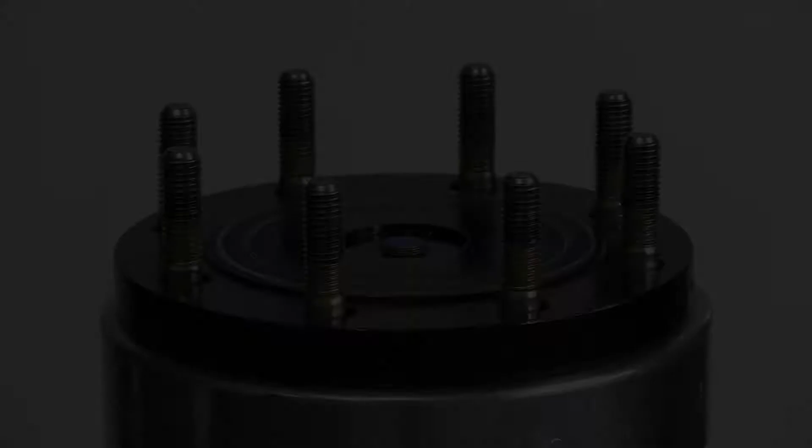What you see in front of you here is a FADU rig, Flange Assembly Demonstration Unit. It is a 4-inch 150 flange with 8 bolts that are individually strain gauged.

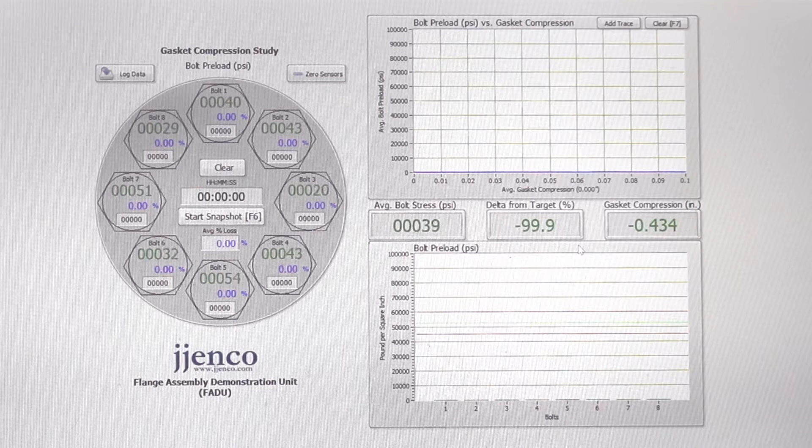So first, with any installation, we must always check to make sure that you are locked out, tagged out, the system is depressurized, and you are working safely.

From there, we will visually inspect the flange, make sure it's free of debris, that the bolts are not damaged, there's no dirt or grime in the flanges, and we're going to number the flanges. In this case, we're numbering 1 through 8 for the 8 bolts, and again we're numbering them in the star type pattern that we are trying to achieve our tightening sequence.

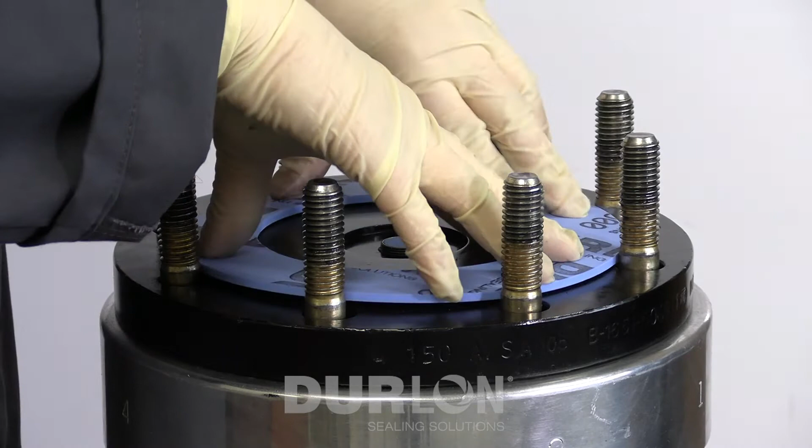Now, the first step is we're going to take the gasket and actually install it into the flange. In this case, it's a ring gasket, so it's going to sit within the bolt circle. Once we've installed the gasket, we're going to insert the top flange on.

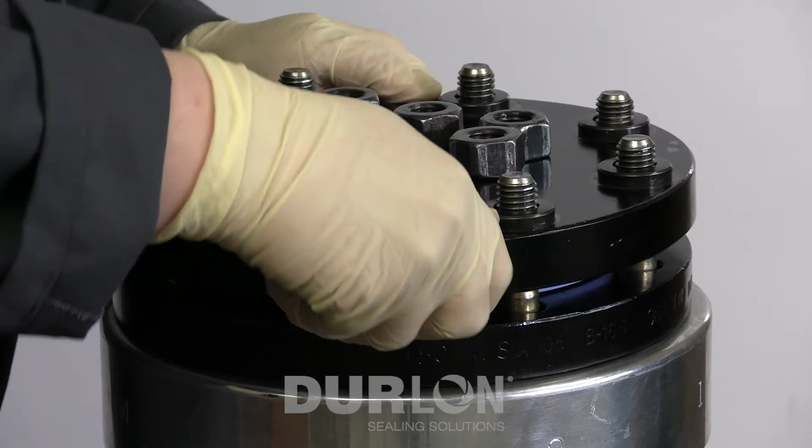Prior to doing that, we're going to lubricate all of the washer, nut threads, and bolts. In this case, we have a spray lubricant for ease of use. What we're trying to do is lubricate any wetted part where you're going to have physical contact. Any part that has any type of friction whatsoever, you want to make sure you have enough lubrication where you can literally see it from within 3 or 4 feet away. There's never too much lubrication when installing a bolted joint.

Okay, so now we've lubricated the flange, the bolts and washers. We're going to put all the nuts on here and hand tighten them, running them down until they snug up. We just want to give the flange a good starting point before we begin with the actual tightening of the installation. Now if you look at the screen, there still really isn't any stress on the bolts yet because we're just hand tightening.

Once these nuts are run down into snug, we will take a hand wrench and give it a 1/4 turn to snug up all the bolts. We're going to just give a 1/4 snug just to start a good reference point.

Now we can take our gap tool before we start and measure around the circumference in several spots to ensure that the gap is uniform. At any point, if you find that the overall flange spacing is more than a certain point, you can back off that applicable nut to ensure again that the spacing is uniform around the circumference.

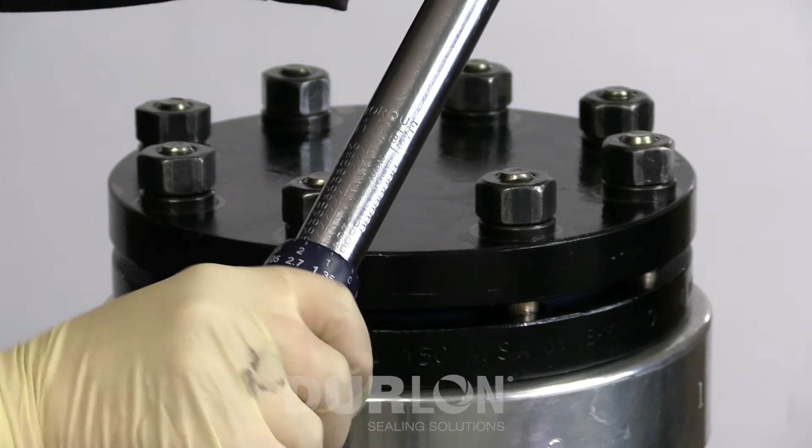So for our installation purposes, we're going to use 100 foot-pounds as our target torque. Now for the first round of our star pattern, we are going to use 30%, which is 30 foot-pounds. So initially, we're going to apply the 30 foot-pounds to our star tightening round.

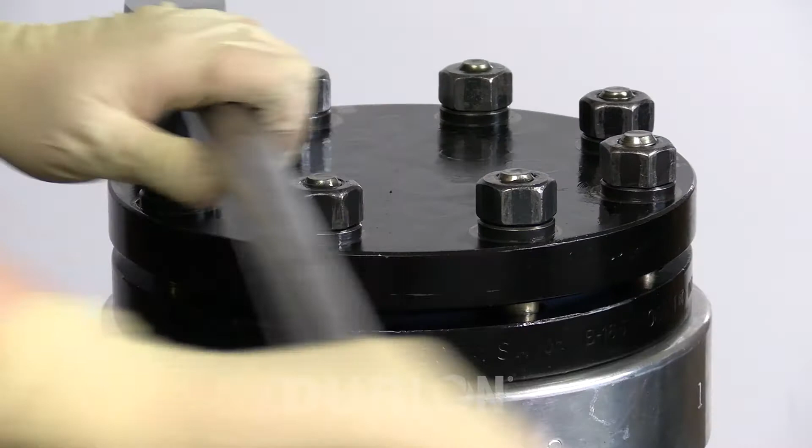As you can see, the first round is generally a little bit more difficult because the bolts haven't been physically tightened yet. But as we go, you'll hear the clicker wrench break. We're just applying the 30% or 30 foot-pounds in this case, and we're going to go in a nice controlled motion until the clicker wrench breaks.

As you're watching the screen here, you can see that as we start to do the star pattern and alternating, the actual bolt stresses look like it's skipping every other bolt. As one bolt starts to increase in stress, another one will start to decrease slightly. This is what is happening in the flange as we start to tighten. Hence why it's very important to use these multiple levels of tightening at different torques and using that star pattern.

And again, as you can see, we're starting to get a nice uniform torque. All the stresses are starting to increase. We're at a target average bolt stress of 14,000 psi, and we're still about 70% from our target.

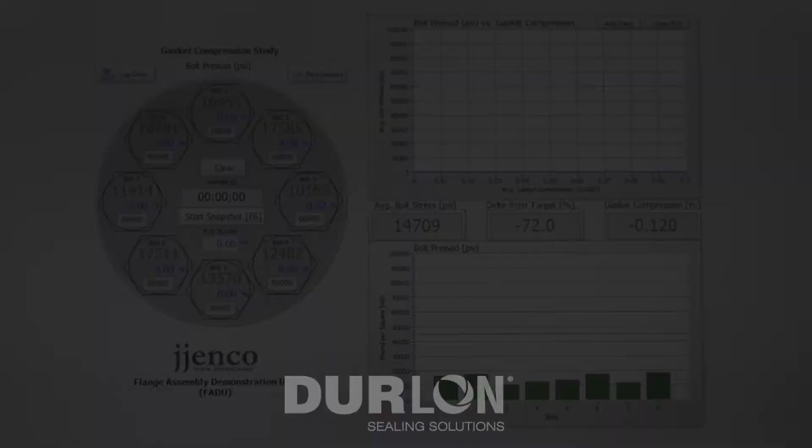So before we do our second round at 60% or 60 foot-pounds, we will actually check the circumference in several more spots using the Durlon gap tool. If you do not have a gap tool, you can always use a vernier caliper or a feeler gauge to check the gap and make sure it's uniform.

Again, we've succeeded, everything looks good. We're going to continue with the target torque of 60%, or 60 foot-pounds in this case.

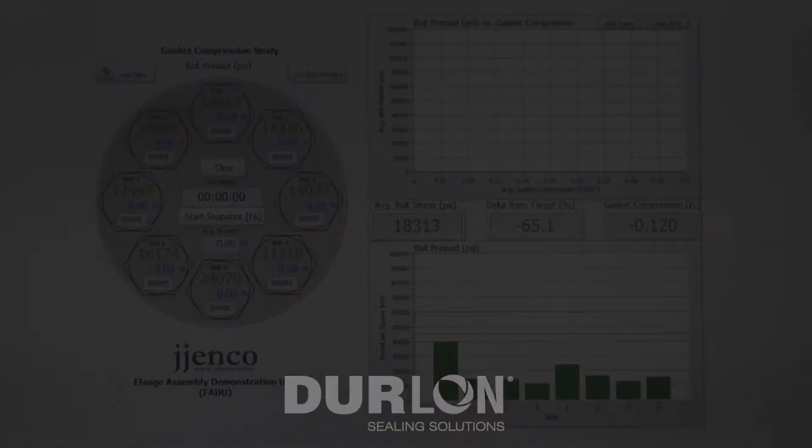When you look at the screen here, you can see bolt 1 starting to increase, bolts 2 and 4 are starting to come down. Again, it's this phenomena where as one side of the flange is tightening, the other side is reacting in the opposite direction.

One thing to point out, in a perfect world, as you're tightening a flange, ideally you would like to do all 8 bolts in one shot. However, that's not really possible. So by mimicking the rounds at 30, 60, and 100% of the target torque, in theory that's what you're starting to do.

So again, we'll do one final check to ensure that the gap is uniform. Once we've checked the gap with the gap tool around the circumference and ensured everything is fine, we will continue with 100%, or 100 foot-pounds in this case, of our final torque in the star pattern.

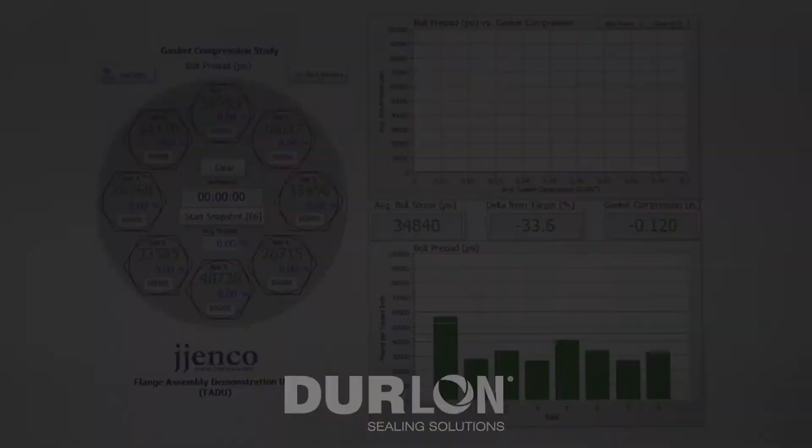Now the star pattern can also be known as the modified legacy method. As you look at the screen, you can see some of the bolts really starting to increase. We're above our minimum and above the average stresses we're trying to achieve, but we're not exceeding the maximum bolt stress for this case, which is approximately 75% bolt yield.

As we're finalizing this final round, you can see the bolts are still increasing, however they're still not uniform. And at the end of our final third star pattern, as you can see across the board, they're not perfect. They're still not straight across or linear.

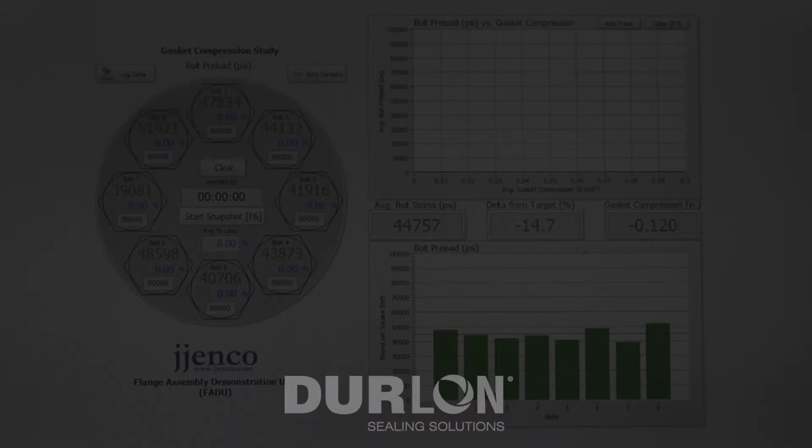So what we would like to do is an additional rotational round at 100% target torque. Basically we will start at bolt 1 and work in either a clockwise or counterclockwise direction, just snugging up the bolts to ensure the load is uniform.

Now as she starts to do this, see that the torques are starting to level out. At any point, if we feel that the nut moves, we must start from that point forward and re-tighten around the circumference of the flange until no movement is further detected. What this does is uniformly stress the bolts to the same stress and ensures uniform gasket loading.

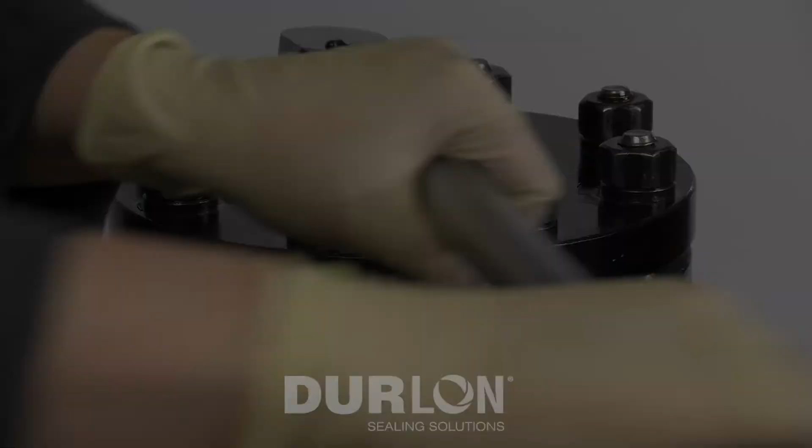As you can check on the screen here, you can see now that we're a lot more uniform across. We're basically at the average or higher for the bolt stress, and we do have a couple outliers on bolt 1 and bolt 8, which are very normal.

At the end of the tightening, when you look at the screen, our target bolt stress for this application was 52,500 psi. We're averaging 54,300. The one thing I want to point out is, as the installation has stopped, you'll notice on the screen that the bolt stress is dropping.

Now this is very normal because of gasket creep and relaxation. Hence why we always recommend doing a retorque, within the 4 to 24 hour window ideally.

So again, as you look on the screen, you can see that our bolt stress is dropping. If we were to wait 10 or 15 minutes, we're probably down to about 45,000 psi bolt stress. Hence why it's very, very important to always retighten your gasket, or retorque.

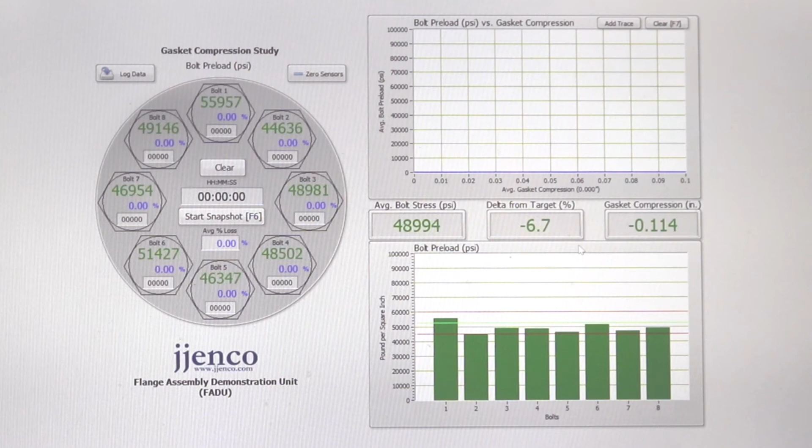We just want to point out, never do a hot torque, meaning the gasket is in service, pressurized, or at elevated temperature. That can be very dangerous. We would always recommend you reach out to your gasket manufacturer for any of these types of procedures.

Okay, so just to recap: gasket installation starts with your initial pre-inspection to make sure the flange is clean and your bolting is in good condition. You always want to use adequate lubrication, and then use a minimum of 3 to 5 tightening rounds. In this application, we showed you 3 rounds at 30, 60, and 100% of the target torque, followed by a rotational round.

It is very important to use a gap tool in between rounds 1, 2, 3 to ensure the gap is uniform, so that we're bringing the flanges together as parallel as possible. Again, we always want to recommend retorquing within that 4 to 24 hours because of the creep you saw earlier in the presentation.